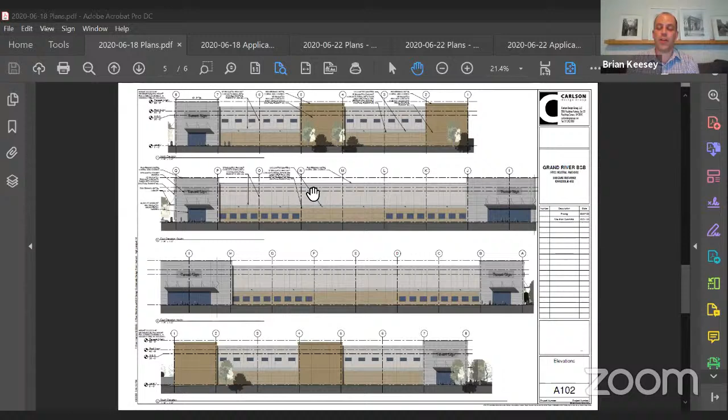Finally, the problem and resulting need for the variance must be judged not self-created by the applicant or predecessors. I mentioned at the onset that this is a blank slate, so some of these standards should be pretty easy to hit, and it is feasible, but it may be at the detriment to some aesthetic and functional concerns in our estimation. So you see our recommendation in that letter, which would be that we don't find that it meets all of the standards. I'd encourage you to listen to the applicants tonight and how they are addressing some of those concerns, and see if the request is reasonable based on what they present to you.

With that, I can take any questions, or hear any concerns you have for me.

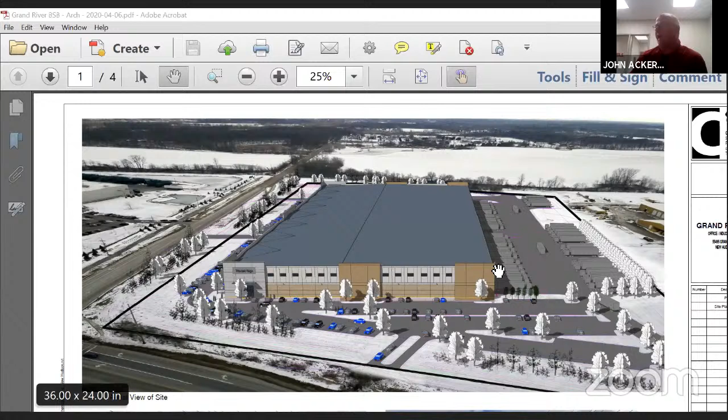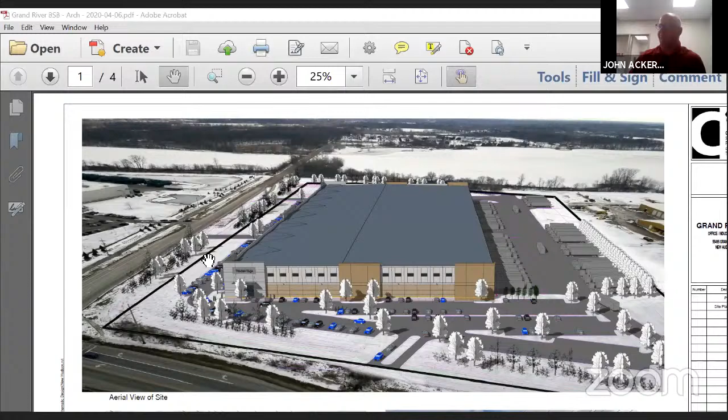So what you're seeing here is an aerial view of the proposed development site. This is South Hill Road and this is Grand River Avenue, so we're looking south toward the development site. The majority of the frontage of this building will front on South Hill. The intent of this building is actually a spec building, so there'll be up to 4 separate tenants in this building, so a majority of the frontages and the front entrances will be along this elevation fronting on South Hill. We're looking south, so this will be the eastern elevation of the building itself.

Scrolling down, this is the elevation you're looking at from Grand River, so this is the north elevation looking south. And these two here are going to be your elevation looking along South Hill Boulevard, or South Hill Road, looking at the building itself. Now the key is that in a standard industrial building, sometimes the wayfinding is a little difficult, and Carlson did a good job of creating these larger parapets that identify the primary locations for entrance into the building. So there'd be one entrance on the north side of the building, and then 3 separate entrances on the east side coming into the site. These lower parapets are placed strategically to break up the massing of the building going across the site. This is a significant sized building.

When we had discussions initially with the client and the architect, as Brian alluded to, the industry trends are moving toward taller, larger, free-span space in the internal layout of a building. Right now the goal is 36 feet, so 36 feet of clear storage rack height within the building itself. Once you add in the trusses, the roof pans, flashing, and everything else on top, you're starting to really push up against that 45-foot limit, including the fact that these building roofs aren't flat.

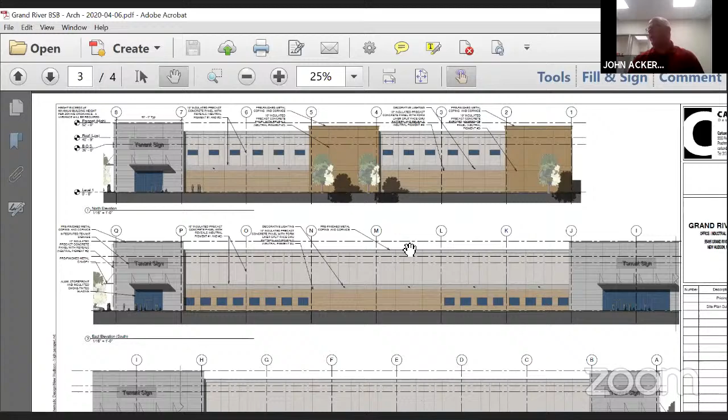So what we have done is, scroll to this one. So what we've done is we were able to lower everything by 1 foot. So what you see right here is the current design that we have.

John, that's still part of the same presentation. You should have one more slide. Pardon me? Yep, no, you're right, it's down, so we'll get to it.

So right now, what we have proposed to you is a 52-foot max height with most of the building being at 46 feet. If we scroll down here, based on some alternate design options we can do through value engineering, we can get this portion of the building down to 45 feet, which becomes compliant with the height requirements. This parapet section would then be 49 feet, and this parapet section, the tallest, would come down to 51 feet, as you can see right here.

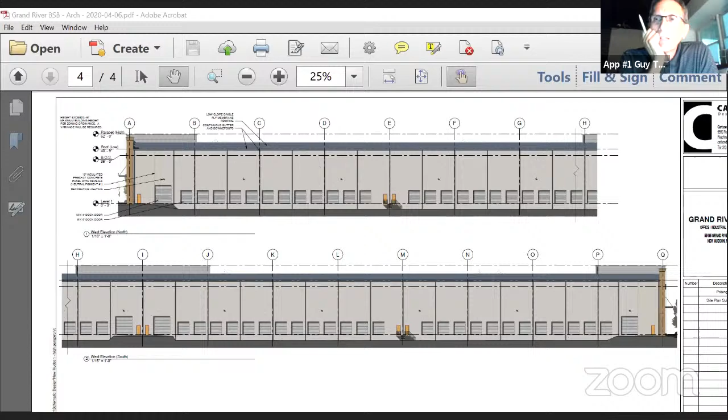So that last portion, we didn't see the plans change. The old plans are still showing to the group. Oh, I'm sorry to interrupt you. Thank you, Brian, sorry.

Okay, are we looking at 51? Did you see 51 there now? Yes. Okay, perfect. So apologies for that.

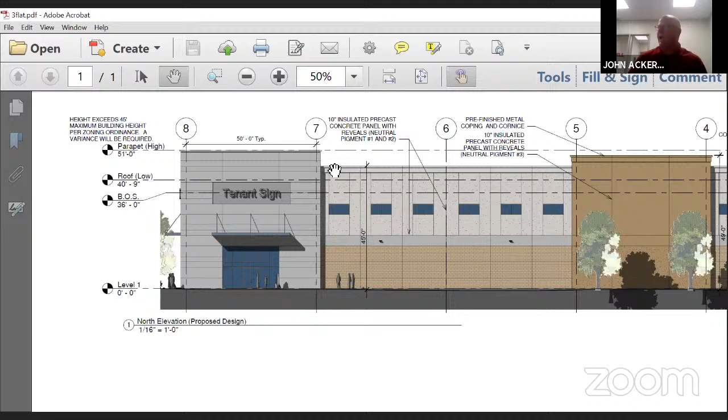So like I was saying, this elevation right here is what's currently in the packet that was submitted to you, showing 46 feet here, 50 feet here, 52 feet here for the taller of the parapets. But after looking at some value engineering opportunities, what we can do is bring everything on top of this building down a foot. So now the majority of the building, 75% of the building perimeter, will be at 45-foot elevation, meeting zoning ordinance requirements. The medium-sized parapet will be at 49 feet, and the end parapets, the tallest portion, will be at 51 feet.

This still will enable us to meet the 36-foot clearance on the inside. As I mentioned, it's going to be a little bit more expensive of a building, but it gets us where we need to be to try and come to a happy medium with everybody.

And I might add, the added height preserves the architectural character. As everyone has looked at this building in the different submittals and responded to it, it's because we've been able to break up the overall mass of the building and create focal points. While we can keep our 36 clear and bring that parapet down to provide those other benefits to the building, it requires more height. So we're asking for the tower elements to be able to exceed the 45.

So Adorno, I don't know if you want to mention anything, but that's basically where we stand right now, and we're here to take any questions you may have.

Thank you. No, I mean, you guys did a great job, and we worked with Brian this afternoon and worked on trying to get closer to the letter that he had, minimizing the impact by lowering it about a foot.

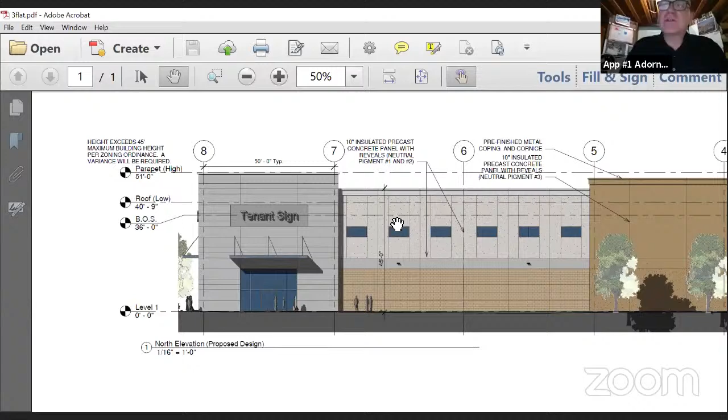Okay. Go ahead, Lisa, had another question. If you mentioned the internal height and clearance is 36 feet, so if you were to not get this variance, would you eliminate the parapets and keep the 36 feet, or would you reduce the entire project so the internal height is less than 36?

Adorno: Let me start with that one. I think for us to reduce the 36 would be designing for planned obsolescence, right? We know the trends are going, this building's another year out, and to put it in the market at that point the trend will become commonplace. I don't think it's a good practice. And eliminating the parapets is going to make it kind of unattractive too, because now you're going to see more of the roof and everything else.

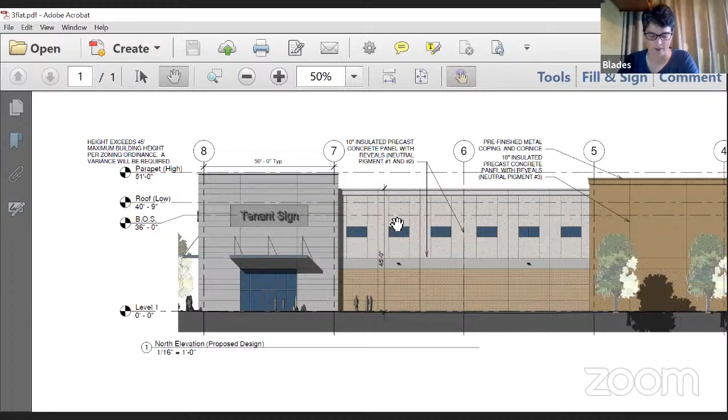And overall, I think this property is pretty unique because it's the corner parcel. It's setting the standards for this very large industrial usage. And I would not like just a box. So I definitely feel like the value is in those parapets, and the value is in the attractiveness of the building. I don't want to drive down Grand River every day just looking at a box with no change to the elevation. So despite my initial thought of like, no way could I support this, I actually really do support this because it brings significant value to our community.

Okay, thank you. Brian, based on the effort and the 11th hour revisions, how does this change the tone of McKenna's letter to the board in terms of recommending or not recommending?

For me, it's a change from a required variance of 100% of the footprint of the building down to, as John mentioned, a very small piece, or very small amount, of the facade.

The standards of the ordinance that you go by for granting a variance are whether or not the ordinance can be reasonably applied to this. Some of the things that I still don't believe is that the self-created issue is one that can be achieved on a virgin site like this. But I'm hearing you guys note a lot of things that are site specific, that are important. Dino hit on the fact that it drops from the road. So there is a lot of reason to consider this.

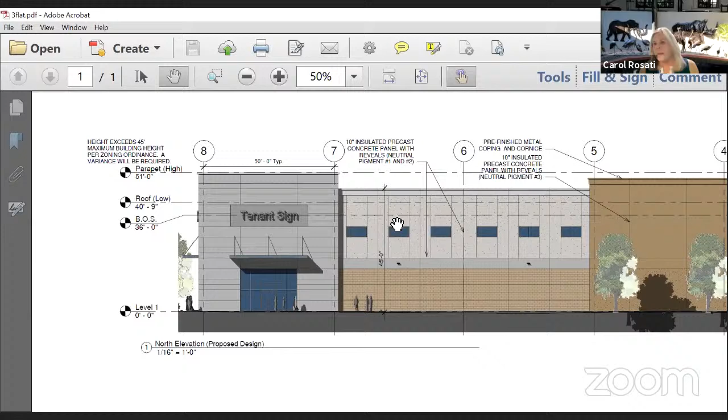Well, I think that's a great point. I personally feel the same way. I don't like the spot that we're put in as a board with this, because it does seem to run counter to several of our tenets, our marching orders, but that's why we're here too, is to apply discretion and common sense. And I'm not frustrated by the township with this or the applicant, it's just the status of things.

And one of my notes early on in the call was, can we put the cart before the horse and approve the variance and then kick it back to the township with a request to review for future.

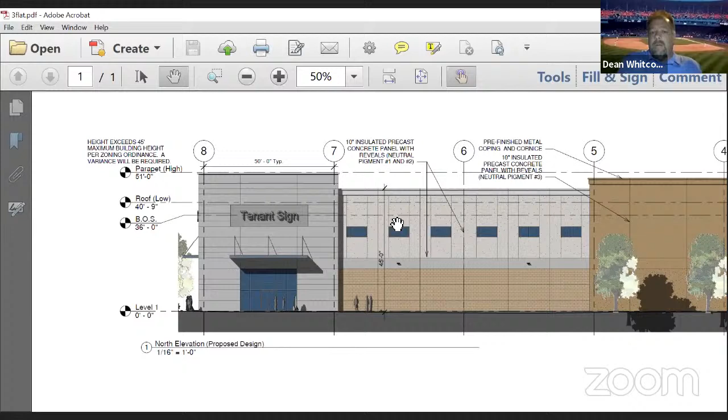I came into the same place as Lisa, that it was hitting a no on so many of our tenets of how we operate, but I see the effort, I love the aesthetics versus not. I would agree with my other board members that although it runs counter to our marching orders per se, it really makes sense in this case. I would apply discretion as well and would be in support of this as well.

I think Dean hit on something that I agree with. We had one case north of 96, where it was that storage or repair facility for the large equipment, and we granted that variance because the machinery was changing. It's not created by the applicant, the machinery was changing. And I feel like they've made a pretty good argument with some data specific information about the obsolescence, and that the trends of distribution are changing, the crane heights. So I don't think that those items are self-created. I think I feel more comfortable hearing that kind of background. And like I said, it reminds me of that one case, I forgot the name of the company, but it was north of 96.

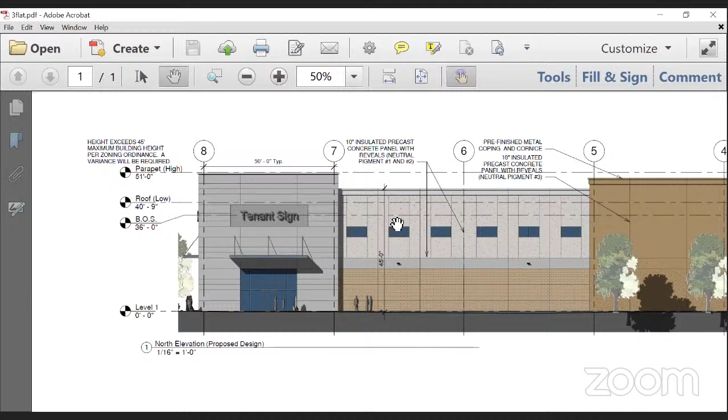And then so where Dean had mentioned about going back and addressing a change, perhaps suggesting that the planning commission look at this ordinance, when we had the issue with the playgrounds for the care center, it seemed so much larger than was required. And then we sent that back to the planning commission, and that ordinance was in fact changed. So I think this gives us a good opportunity to maybe send this back, perhaps suggest to the planning commission to maybe create an overlay district for the corridor there, or just take a closer look at that. But as Dean mentioned, I don't necessarily mind saying yes to this variance in hopes that the ordinance does end up changing to accommodate that changing trend.

You said that was the exact building I was referring to earlier, the one you mentioned north of 96. So I would agree with you.

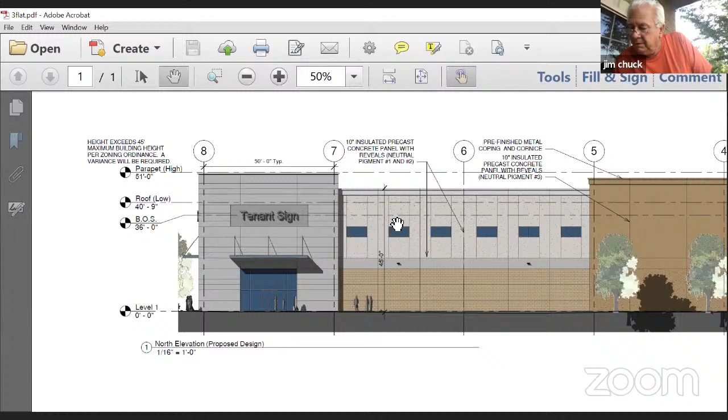Mr. Chairman, I'm ready to make a motion if you're ready for one. Fire away, Mr. Chuck. Well, I guess I'll make a motion that we send this forward, granting the variance as proposed in the revised plans.

The applicants provided, as well as the letter from McKenna dated, did you say July 9th, Brian? 17th, I'm sorry, 17th.

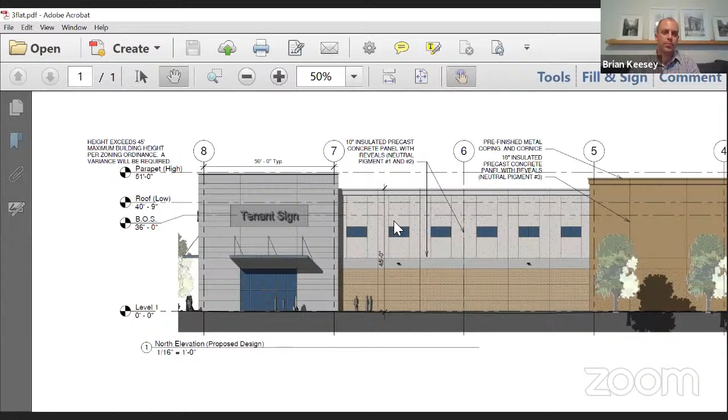I don't know what else I need to add, because I don't see an applicant number, but do I need the Sidwell numbers? Does anyone know? They're right on the agenda, Mike, Jim. Oh, so I need to include the Sidwell numbers in my motion? You can if you want.

I'm a little, and I hate to stop you in the middle, but I'm a little confused by your motion because you referred to McKenna's letter. McKenna's letter recommends denial. You're right, Carol. So I would just make a motion this be moved forward with the requested variances by the applicant. Should we do the height then, the 45 feet for the building, 49 feet for the low parapet, and 51 feet for the high parapet?

Well, that's what they presented in the revised plan, but I'm okay with putting that in there, Lisa. Right, because it's not anywhere in writing for our record.

That's fine. Kelly, did you get that? I have it, okay, I'm fine. Thank you on that. Carol, any other guidance there on that motion? Can you articulate what the practical difficulties are?

I think listening to the various comments made by the board members, they gave reasons why this would be practical difficult. It's aesthetically pleasing. It does bring value to the township as it relates to developing that industrial corridor. I don't know what else I could add to it.

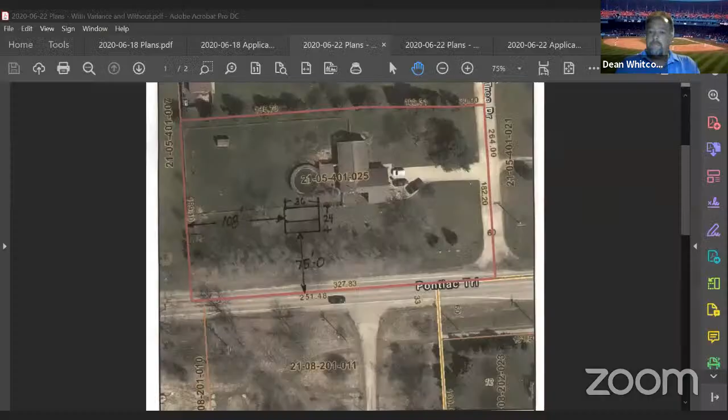Thank you, Dean. I'm showing the property on the screen, and we are looking at a property just west of Martindale on Pontiac Trail. And so you can see the proposed location of this structure. The reason that it does not comply with the ordinance is that the main home is not 75 feet setback from Pontiac Trail. So technically, per our ordinance, on a piece of land less than 2 acres, this structure should be essentially anywhere within the fenced-in area of the yard. Had the property been greater than 2 acres, this location is not a problem and would be approved today. And as you pointed out, Dean, the setback from Pontiac Trail is 75 feet. So had the main residence been located just farther south, this proposed structure would comply with the ordinance.

In your packet, you've got several pieces of information to consider, and one of the key things in our review is the presence of flooding in the rear yard on this property. We've hit on it over and over again in our review, but the visual evidence is pretty compelling that if you were to build a structure in this rear yard, you would really have to bump up the grade to get a foundation or a finished floor level that's going to be outside of the water level. And so that's something that we're going to keep hitting on - strict compliance with the restrictions governing the area and the setback for the structure.

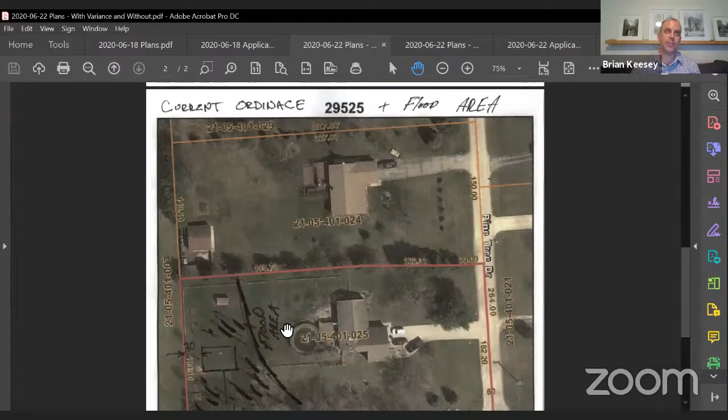When the rear yard is largely flooding, let's see, on the second page here shows a bit of the flood area as well as depicted. That's a pretty substantial area, and really the structure makes sense to us in terms of getting it out of the flood zone.

When you think about the things that make this unnecessarily burdensome, we've got to build up the grade significantly, potentially just kicking the can down the road to another property owner in terms of where the flood is going to occur when that happens. We see this throughout the township, more and more requests about water and flooding issues and properties underwater, especially in the spring. So anything that we can do to minimize the amount of additional fill where we're flooding is something that we are typically going to support.

The variance, the second standard being that this will do substantial justice to the applicant as well as other property owners. Again, we want to take into consideration on a site-by-site basis where things are going and the potential impact that they have. In this instance, we think it's fair for the property owner to develop the structure outside of their flooding area. We also don't think it causes any impacts to the justice that any other property owner would have. If this property were developed from scratch today, somebody could build their main residence up to 75 feet from the property line. This location really doesn't increase impact beyond what we would expect to see on any property in the R10 district.

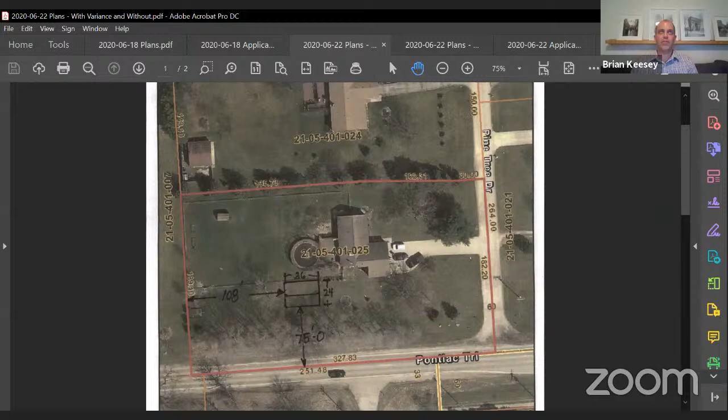The location of the proposed structure is pushed back about as far as the applicants are comfortable with in terms of the location and keeping out of that flood zone. So we don't believe that a lesser variance would help out in this instance. We mentioned unique circumstances on the property are the flooding and the location of the boundary of that flood zone. So we find that this standard has been met.

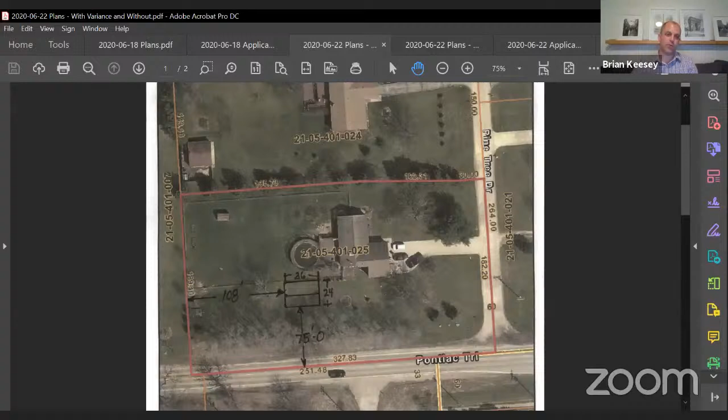And then it is not a self-created issue in this case. We mentioned this is happening on specific properties throughout the township, be it changing flood patterns or just the increase in development and the suitability of the drains in the township. We do hear these requests more and more. So based on those standards, we think this is a reasonable request.

We find that our ordinance does place a bit of a burden, and that the resultant fix for the location that's compliant is going to cause, or has the potential at least to cause, more issues on adjacent or nearby properties. So for those reasons, we would recommend approval of this variance.

Okay, thank you, Brian. Any questions for Brian, or we hear from the applicant at this time?

Yes, I'm Kerry Castle, 29525 Pine Tree Drive. After looking at every possible option, there was just no other place to put it on this property because of the flooding.

And if we move it farther, we can't move it farther north because of a septic field. We're far away from the septic field. And if we move it farther back, then we're moving it into the floodplain. So this was our only reasonable place to put it.

It does not obstruct views or anything for road-wise. It's far enough back from the house and the garage where you're not going to really see it. And it is going to match the house, vinyl siding. It's not a pole building, it's a stick-built garage, and just be for car storage.

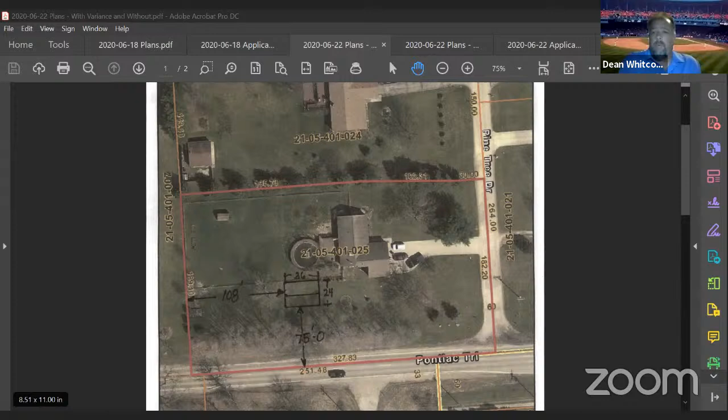Why don't you ask again, Lisa? We had a little disruption there. Brian, how much storage is allowed on this parcel by percentages, by rights? Let me run the math on that real quick and I will get right back to you. Thanks.

Okay, I'm going to go ahead and open the public hearing up on this. Public hearing is open on this case at 7:52. Mr. Milburn, any public online that would like to comment or any questions? There are no public online at this moment. Hearing none, we will close the public hearing at 7:52.

I'll jump in here. I would tend to support this variance for all the reasons laid out in the McKenna letter, and I won't beat a dead horse by going back over them. I would just add that...

I actually know Stan. I don't know if Stan remembers me, but I ran Astro and Allied for years, Stan. I'm no longer employed there, so I don't have a conflict. You're muted, actually, but I know that the quality of work they're going to get is going to be outstanding. So I have no concerns about the aesthetics of what they're going to have there. So I appreciate that. Thank you.

Absolutely. To answer Lisa's question - yes, Lisa: 1,260 square feet. So this structure, they could have up to 1,260 square feet. And as proposed, this is about 860, give or take.